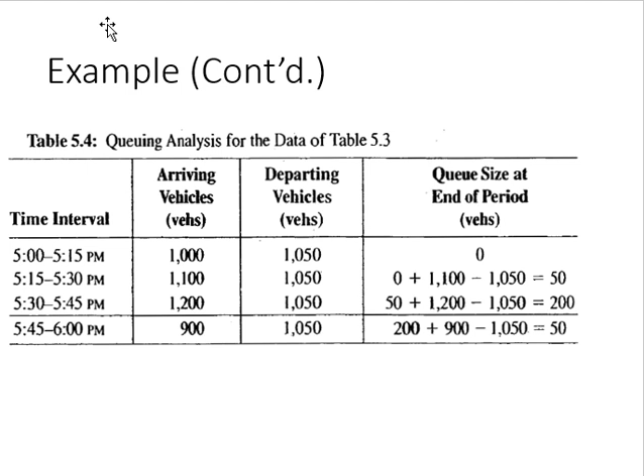Got it? Okay. Now I need hourly volume and I need the maximum flow. So what is my hourly volume here, if I want to calculate peak hour factor for this example? 4,200. Okay, the total of the full hour. So this is my capital V, and what is my small vm15?

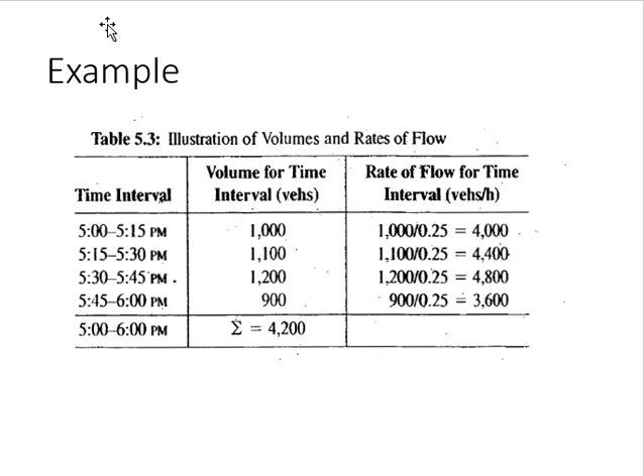1,200. Okay, so if you take these values, then the peak hour factor comes out to be 0.87. Okay, you can check it. Now, peak hour factor has a range. It has a range from 1 to 0.25. 1 is the maximum, 0.25 is minimum.

Now, if you look at the equation, when will I get 1? When the V, the small v, equals what? 4, and what do we call this? 4 multiplied by flow, what will it become? No. Listen, don't talk. Just equal, between the equation.

If flow of 15 minutes is multiplied by 4, then it becomes what? What do we call it? Consider the hour. Hourly volume. Maximum flow rate. We call it flow rate. Okay, we are taking maximum, so maximum flow rate. But any flow of 15 minutes multiplied by 4 is flow rate. So, when the full hour volume is equal to maximum flow rate. V15 is flow. When you multiply by 4, it becomes flow rate or rate of flow.

Got it? Clear or not? So when full hour volume is equal to the flow rate of 15 minutes, whatever rate you are getting out of 15 minutes, it's the same for the full hour as well. Got it? This was the full hour, and this is the rate from 15 minutes. So the rate of 15 minutes is equal to the actual volume. Whatever happens here in 15 minutes, it is happening with the same rate in the whole hour. This is what it means.

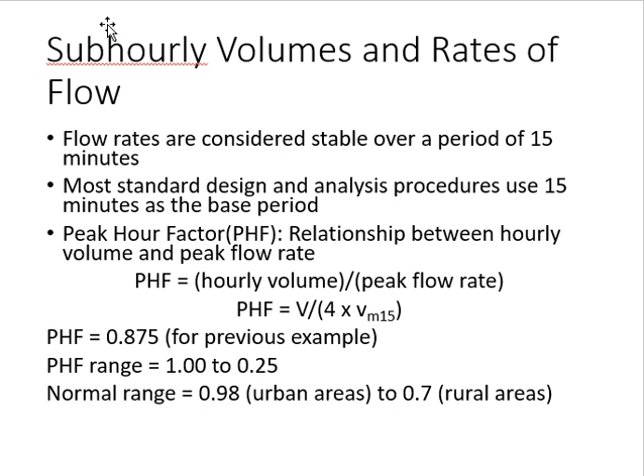This entire discussion, volume, daily volume, hourly volume, flow rate, peak hour factor, was about one macroscopic parameter, which is volume. Now we will move on to the other parameter, which is speed and travel time. Speed and travel time are always considered together in traffic engineering. Why? Because speed equals distance over time, so they are linked, not separate. Even later, when you discuss speed data, you will also discuss travel time data. They are interlinked.

What is travel time? The time taken by vehicles to go from one point of the highway to the other point of the highway. Simple, right? Now we are discussing speed as macroscopic. What is the difference between macro and micro in terms of number of vehicles? Micro is for one vehicle. Macro is for a group of vehicles. Will a group of vehicles have the same speed? No, their speeds will be different. So to make it macro, I have to take their mean. So we are talking about mean speed.

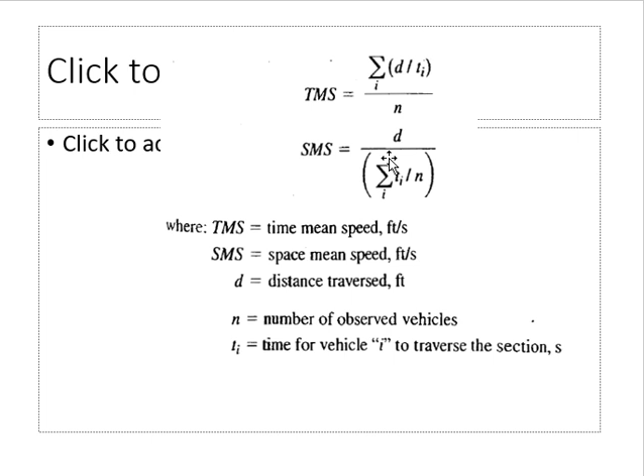Okay, now for SMS, I need to calculate this first. T upon n, summation of T upon n. Okay, basically the average of travel time. How much is that? 19.83. 19.8. Okay, then SMS is the distance upon this. How much is it?

Any problem, any question? Clear?

I don't care. Do I care? Huh? I have +1 in the class, I don't care. And you are talking about plus 0.1. Come on. Okay, any other problem? Okay. Even if it's 0.1 in your grade, I don't care. Okay? So if you feel I will get an F because of 0.1, yes, you will get an F because of 0.1.

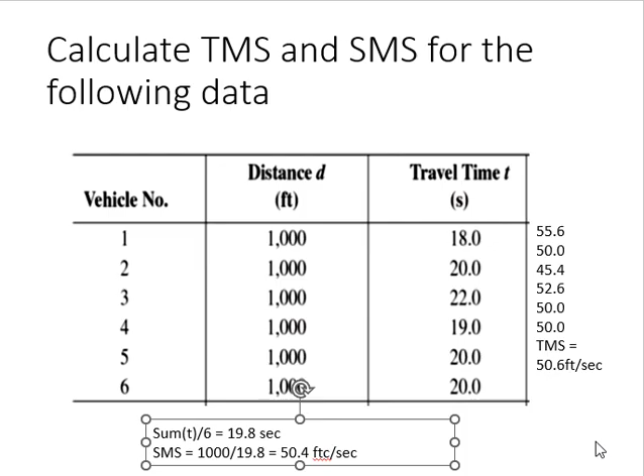Okay. The third thing is density. The third macroscopic parameter is density. Now you know about density of material, right? Density of concrete, density of cement, steel, wood. Your own densities. So how do we define density? Mass over volume. Now traffic mass is made up of what? Traffic is made of vehicles. So instead of mass we will use vehicles.

And we are not concerned about height and width and these things, right? So we will not take volume. We are only concerned about the segment. The segment has length. So instead of mass, vehicles. Instead of volume, length. So density is vehicles per unit length. And the length can be in miles or kilometers. Okay. Now, if I ask you to measure density, how will you do it? How do you measure density?

Vehicles over? Which vehicles? Which vehicles? Huh? Vehicle passing the segment. Vehicle passing the segment is what? Volume. So, if you count number of vehicles, I'll say it's volume or flow. I will not call it density.

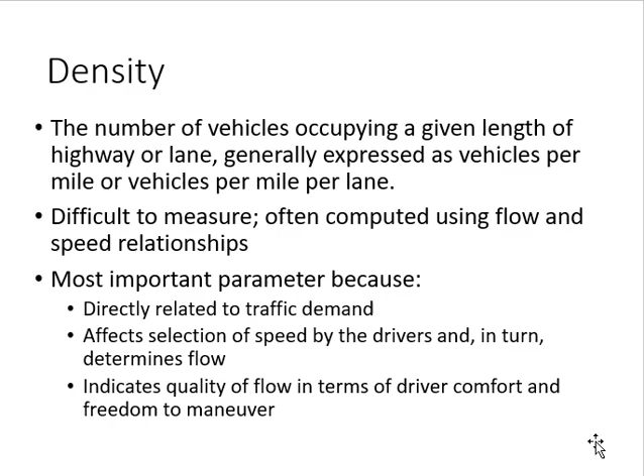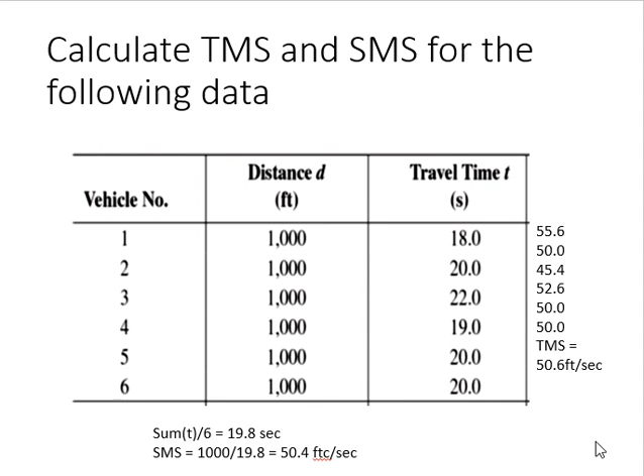Okay, now we move on to microscopic parameters. Within microscopic parameters we already have seen one of them. Which one? Speed. These values, they are what? The speed of one vehicle. So these are microscopic. When you took the average, then it became macro. But these single values are micro. Individual values are micro. So this is already covered.

Then we have spacing. Spacing is the distance between two vehicles. Now the only clarification here is when we hear the word spacing, we generally assume that it is this space, the clear space between the two vehicles. For us traffic engineers, this is not the case. We measure it from a common reference.

So it cannot be from the rear bumper to the front bumper or the rear tire to the front tire. It has to be from the front bumper to the front bumper. If you want to take it from the rear bumper, then to the rear bumper. If you want to take it from the tire, then to the tire. Got it? So what will happen? If I take it from front bumper to front bumper, the length of this vehicle is included. So this is a clarification here.

Now, if you take spacing between two vehicles, you will have one value, right? Spacing between two other vehicles, same value? No. So for every pair of vehicles, I can have a different value. So these values are microscopic because each value is between two vehicles. Now you take all these values and take their mean. It becomes macro. Now, what are the units of spacing?

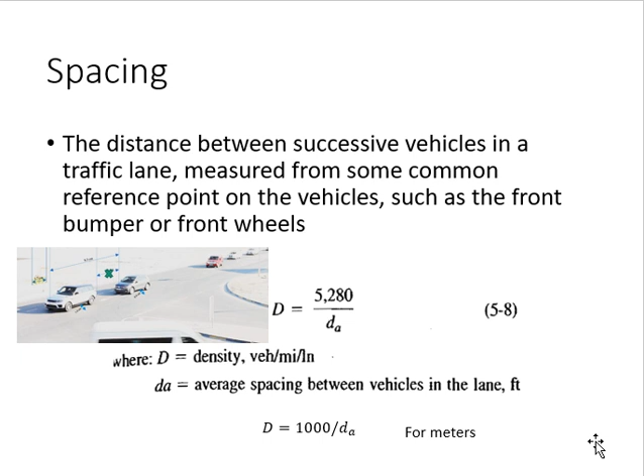Okay, and meter and kilometer is one unit system. Then we have headway. Headway is the same as the spacing, but in terms of time. Spacing was distance between two vehicles, same point. Headway is time between two vehicles, same point.

And again, the same issue that we had for spacing: it should be a common reference. So if he started with the passing of the front bumper, he should end with the passing of the front bumper. Got it? Now, what are the units of headway? Vehicle per feet? No. Say again. Second. Yeah, second per vehicle. Headway is time between two vehicles, right? Second per vehicle. Now again, it's microscopic, right? Headway is microscopic.

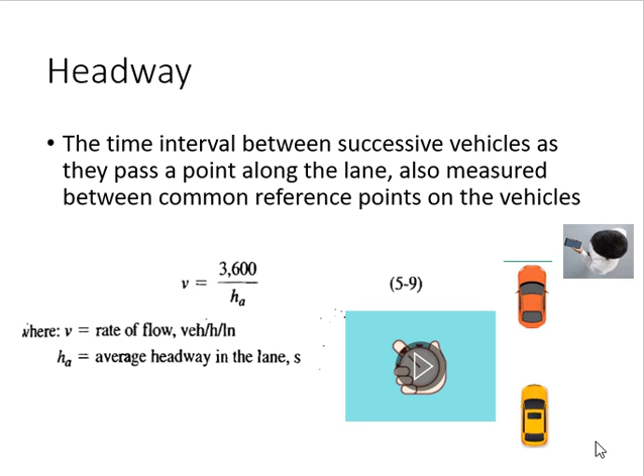So like we did for spacing, we can do the same thing with headway as well. But you have to take average headway because flow rate is macroscopic. So if you take the inverse of average headway, it becomes rate of flow. And this is very easy. The factor is for feet to meter, seconds to hour.

Last thing. In this course, we will be discussing the macroscopic parameters: volume, speed, density. Even other courses, any book related to traffic design, engineering, management, focus more on volume, speed, and density. But where is the use of microscopic? We will not use them very often, but one use I already showed you: if you have headways, you can find flow rate. If you have spacing, you can find density. So one use is to use micro to find macro.

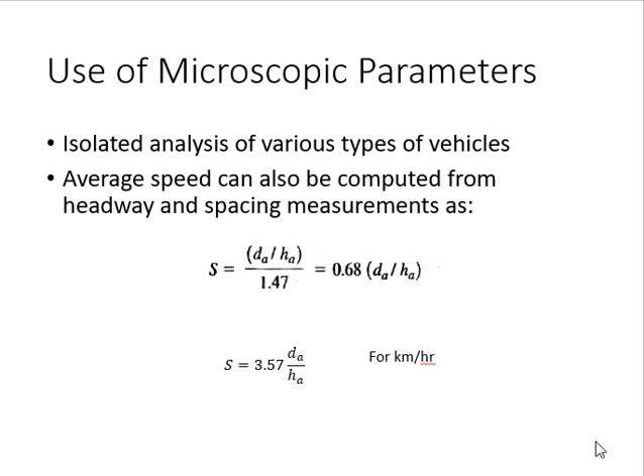Because if you take macro and give me, for example, space mean speed, this space mean speed is for all the cars. So in order to differentiate between them, you have to take their microscopic parameters. Got it? So one application was to find macroscopic parameters, and the other application is to see the behavior of a specific type of drivers or